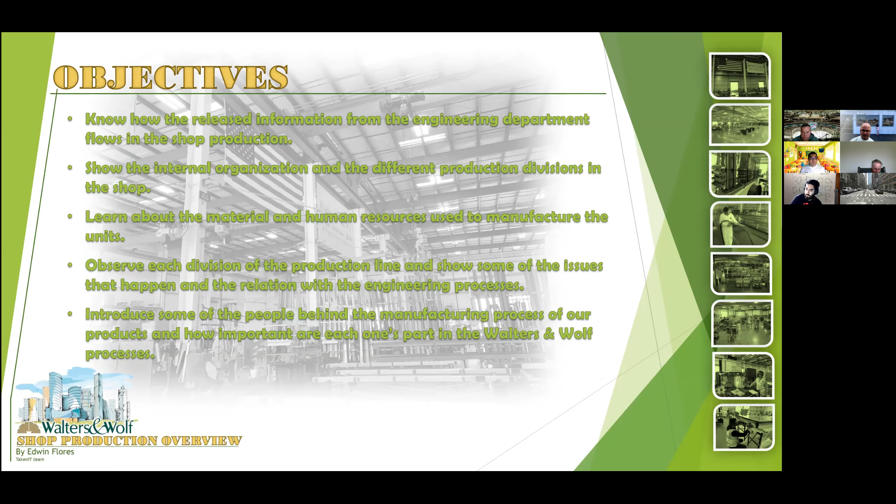I think to begin, it's a good idea to explore the objectives of my presentation. Some of them are: know how released information from the engineering department flows in the shop production; show the internal organization and different production divisions in the shop; learn about the material and human resources used to manufacture the unit; observe each division of the production line and show some of the issues that happen and their relation with the engineering processes; and introduce some of the people behind the manufacturing process of our product and how important each one of them is in the Walters and Wolf processes.

In this slide, we can see that Walters and Wolf currently has 7 shops in 4 different states: one in Seattle, Washington, one in Las Vegas, Nevada, one in Gilbert, Arizona, and in California there are 4 shops, 2 in La Verne and 2 in Fremont, where we can find Shop A and Shop B.

It's precisely in Shop B from Fremont that I'm going to base my presentation, due to the experience I had there while I was a production worker. I decided to take Shop B as an example, understanding that all the shops would follow the same production process, perhaps changing something, but following a general standard.

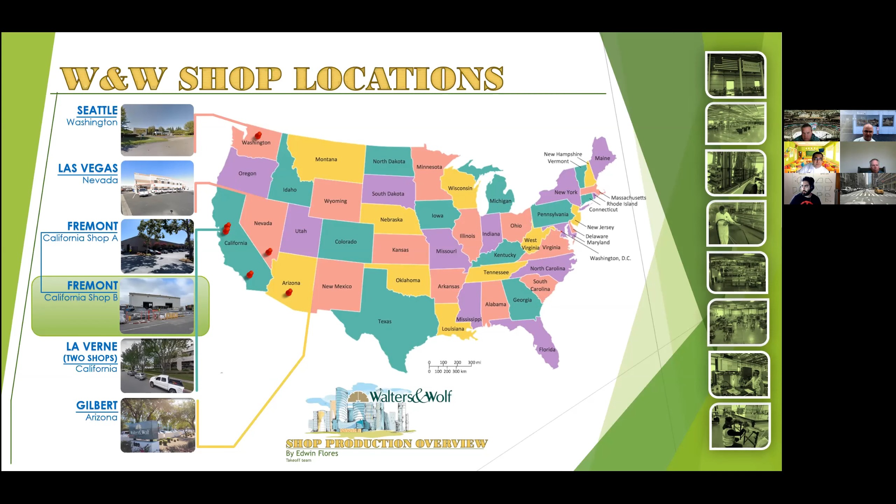The shop is organized based on experience that, through feedback, has managed to improve production time and quality of our products. In the shop, all resources are in constant movement. The shop works around 18 hours a day, divided into shifts.

In general terms, all shops are managed by a shop manager, but each shop has a shop foreman who keeps constant study, revision, and control about the whole process in 3 moments: before, during, and after the shop production. The shop foreman verifies strict compliance with the production process, respecting design criteria and special conditions previously reviewed and approved in releases from engineering. He is also the connection between the engineering department, shop, and field.

Parallel to the shop manager, and being support to him, we find the QC supervisors and leaders of division in the shop, all of them following and taking care of every part of the production.

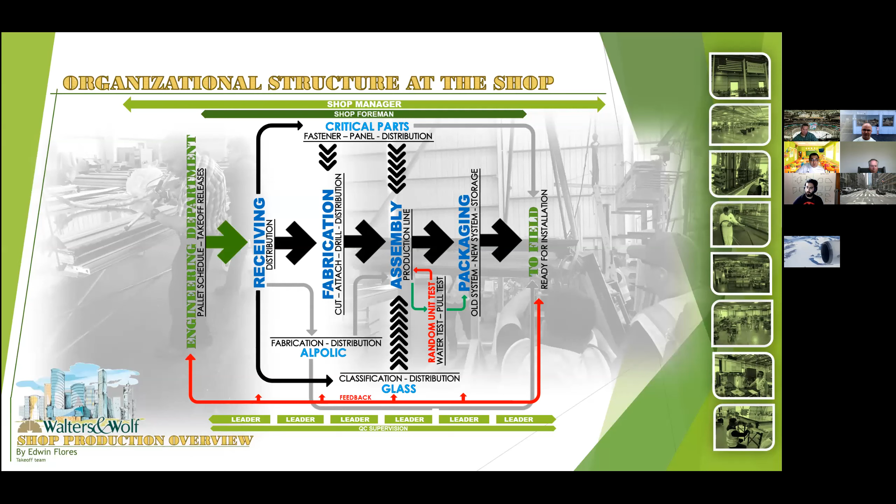Like part of the diagram talking about shop organization that I showed you before, before shop production starts, from the engineering department all necessary documents previously reviewed and approved must have been released, because all of them will be the guide to follow in production.

As you know, some of them are pallet schedule, glass schedule, panel schedule, and all the releases like fab ticket, units fab, metal, glass, etc. This is information we are familiar with, but before going to shop production, it needs to pass through many filters, and the last filter is programming, where the programmer gives a final review to the released information to avoid any issue.

It's here in programming where the real shop production begins, because the programmer enters all the information to the shop machinery to fabricate the parts for each unit.

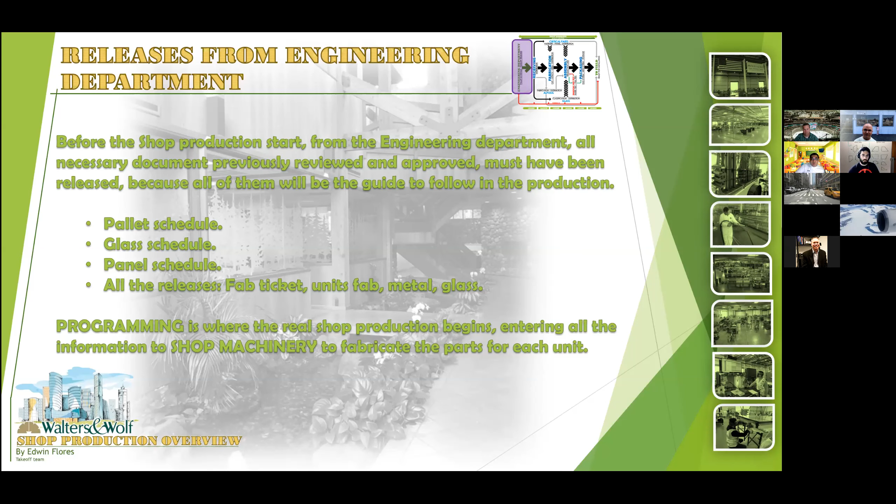If we keep moving along the direct line of the diagram, we find receiving. After the information from engineering has been released, the first stage of shop production is receiving. Here the material that will later become the designed and checked unit is entered, like glass, aluminum, fastener, composite sheet, panel, and others.

At this point the material has not been fabricated, so it's distributed to the different divisions of the shop in stock lengths, sheets, etc. The glass goes to the glass division, which will classify and distribute it to assembly. For aluminum, the group called material flows was created, with the specific function of making aluminum profile packages that will enter their respective fabrication, later used in assembly. The packages can be formed based on daily production scheduling or cut list.

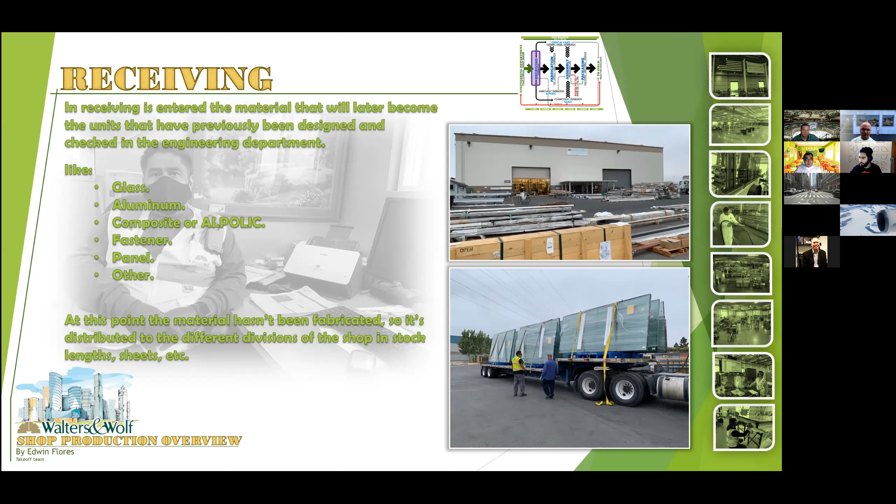For ALPOLIC fabrication, we move to the lateral side of the direct production line in the diagram. ALPOLIC is one of the lateral divisions of the shop production line, and basically it's a fabrication line apart, because after finishing composite panels, they ship them directly to the field. However, in some cases, the composite panels are fabricated to be part of a unit in shop production, being delivered to assembly.

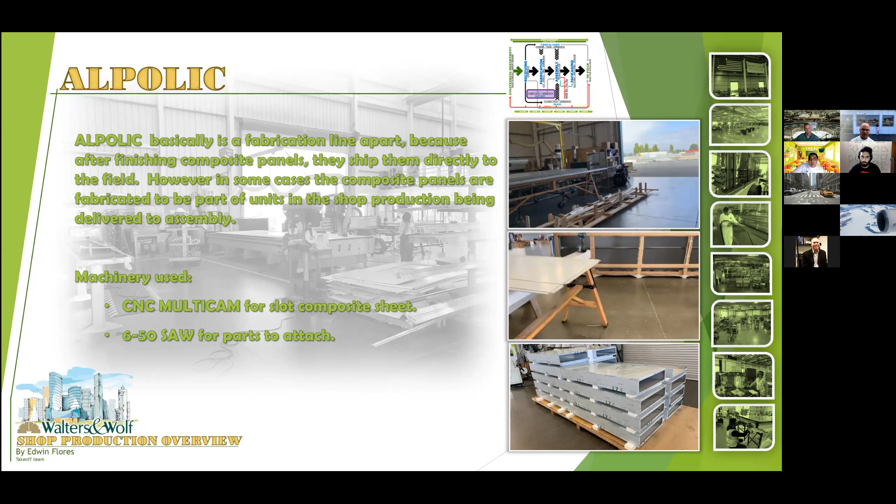For the specific case of ALPOLIC, it's the panel team which creates, checks, and releases drawings and cut lists, but again it's necessary to program the multicam machine. Like a mini production line, ALPOLIC fabrication receives composite sheets from receiving, then puts these sheets on the previously programmed multicam machine, and following the cut list, every sheet is slotted to be folded based on the design.

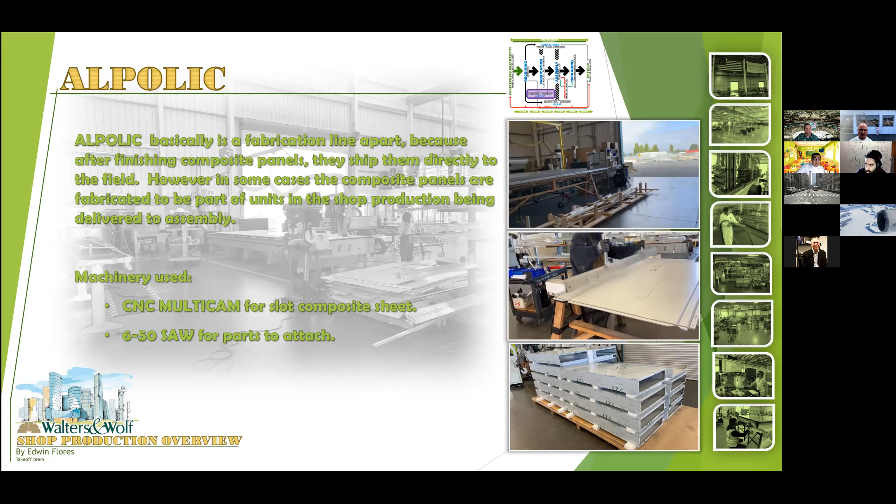After folding the slotted sheet, paying attention to the correct fold angle, all necessary attachments are added. When the composite panels are finished, they are carefully placed on pallets to be transported to the field or to the production line. Production here is per day, and normally multicam machines slot 20 units per day, but workers can fold around 30 sheets depending on the quantity of folds in each panel.

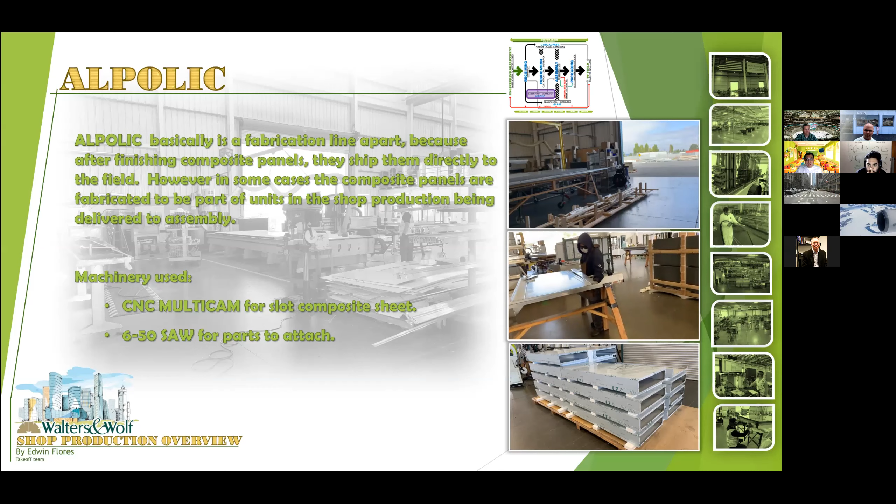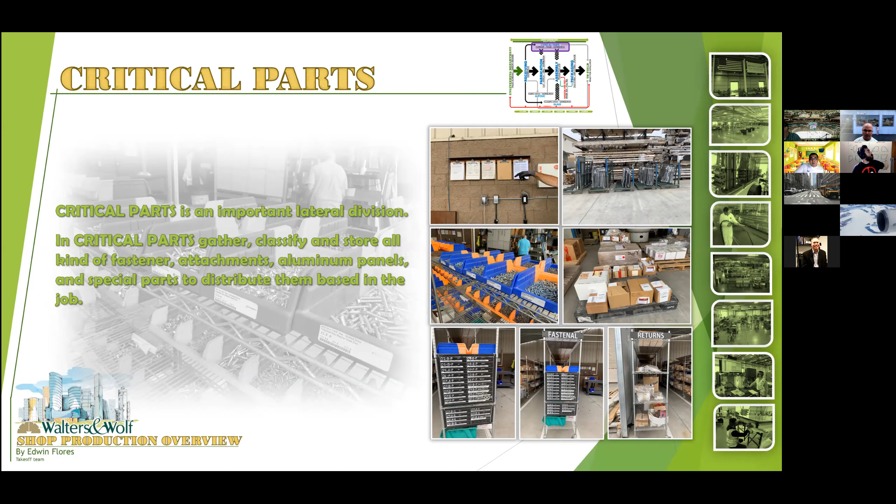The glass division: on the side of the diagram we find the glass division. When the glass arrives at the shop, it needs to pass through a check and classifying process before going to assembly, because it's necessary to take care of any defects or conditions that could affect the quality and warranty of the product. This is the reason the lateral glass division was created.

To classify before assembly, they use glass release, palletification, and glass by pallet. They also follow the standard operating procedure, or SOP, which is a logical sequence to make every step flow safely and accurately.

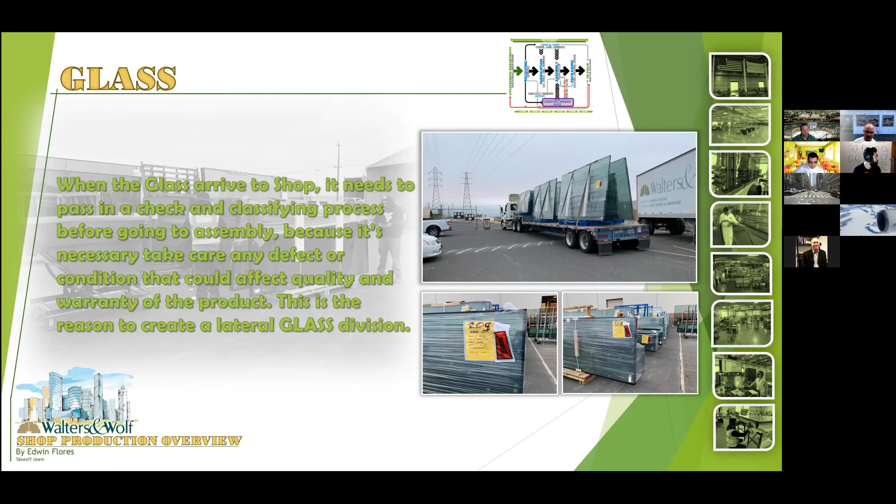With the glass already loaded, people proceed to open the crate, following the glass crate opening and securing SOP, which says: wear proper PPE, or personal protection equipment. When the crate is safely set on the glass rack, secure the load with rope.

The rope should be placed no lower than 12 inches from the top edge of the glass, and left on as good slats have been removed. Bend or remove any nails, to avoid accidents and glass damage. Glass inside the crate should not be loose. Choose the appropriate forklift that can handle the load, and check the rope and glass before manipulating.

The placement of the glass on the rack is done using the glass rolling rack SOP and the sorting glass SOP.

Some issues we can find when handling glass: if you don't carefully follow safety protocols or SOPs, things can happen like broken glass, incorrect placement of the glass, causing delay in the production line, or worse, serious personal injuries.

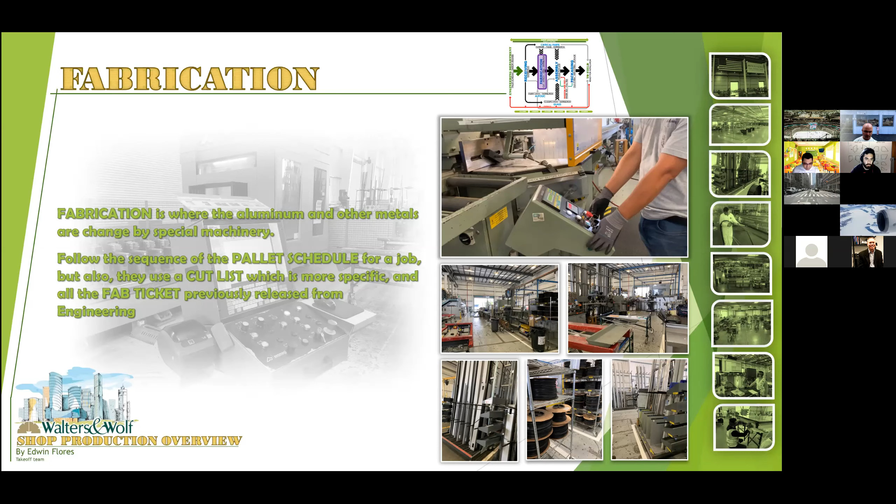The machinery in fabrication is Planet, which is slower than the other machines in the shop, but it's used for more complicated cuts with minor details.

The other machine is Quadra. It's faster than the other machine in the shop, but its cuts are less complex.

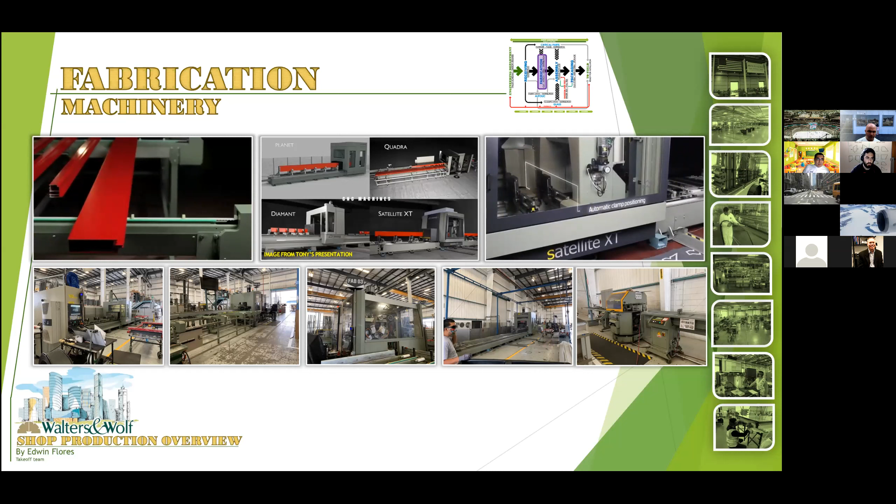Diamant is used for holes and notches. And the Satellite XT, like Tony told us in his presentation, is basically the modern version of Diamant.

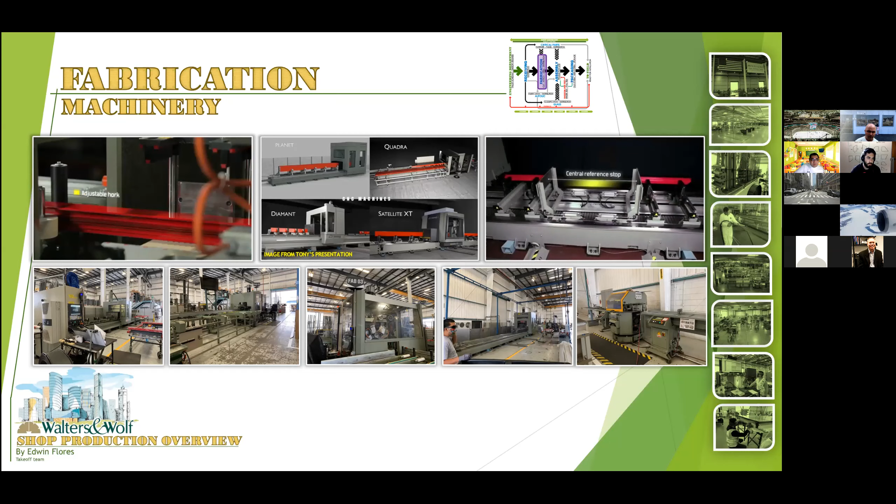In the fabrication process, the part needs to be marked with the mark number. It will also be cleaned using an air hose to blow any metal shavings off the part or from inside of it. It's important to wipe down any oil, dirt, or layout line on the part with an alcohol wet rag, then with a dry rag, without erasing the mark number when the part is cleaned.

When all parts are fabricated and their attachments installed, they will be placed on racks with a slot to separate each unit, staged for the next division, which is assembly.

Some issues in fabrication: when the fabrication process starts, the machine operator follows all SOPs in each fabrication stage and trusts that all released fab tickets have been reviewed and approved and the machine has been programmed. That is why the programmer performs a last back check looking for any issue.

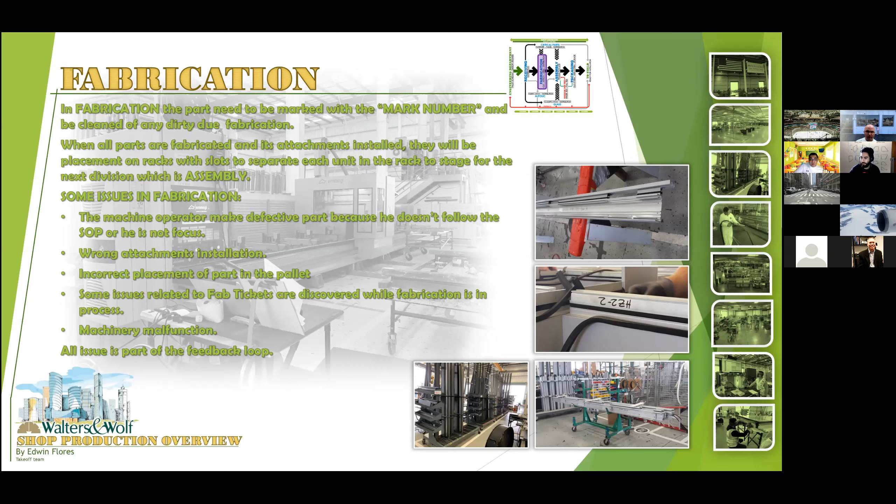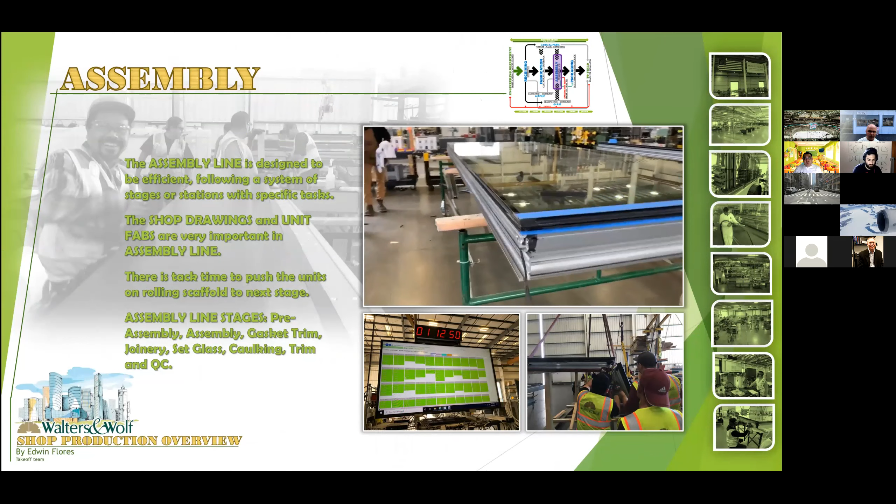Continuing with our diagram in the direct line of production: like a big Lego system, when all parts are ready and placed on their respective racks, with one to six units depending on the pallet schedule, the assembling of each unit starts.

Although most of them follow the regular process based on shop drawing and unit fab, some have special conditions that require extra care and attention in assembly.

The assembly line is designed to be efficient, following a system of stages with specific tasks, achieving specialization and quality in each of them.

Unit production varies based on the pallet schedule, and the quantity called per day can be set depending on how complicated the unit assembly is.

There is a takt time to push the unit on a rolling scaffold to the next stage. It's a big circle dancing to the takt time rhythm.

The stages in the assembly line also vary with the necessity or how complex the project is, but normally we find pre-assembly, assembly, gasket trim, joinery, set glass, caulking, trim, and QC.

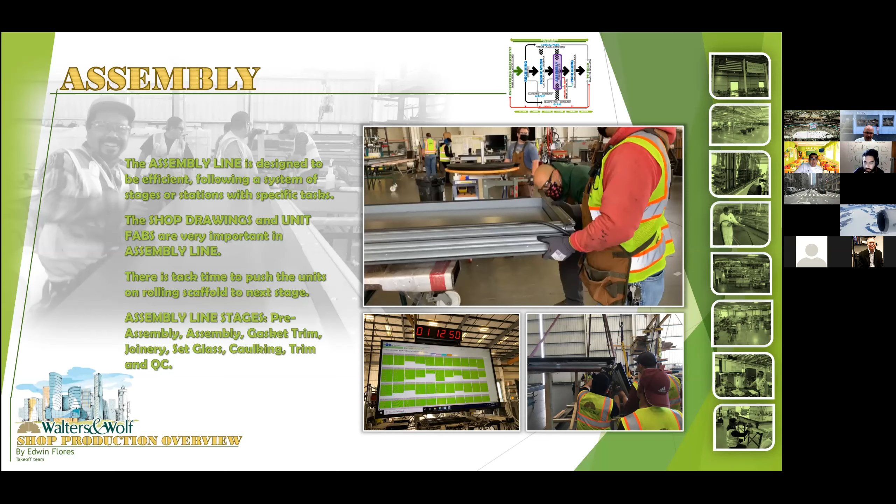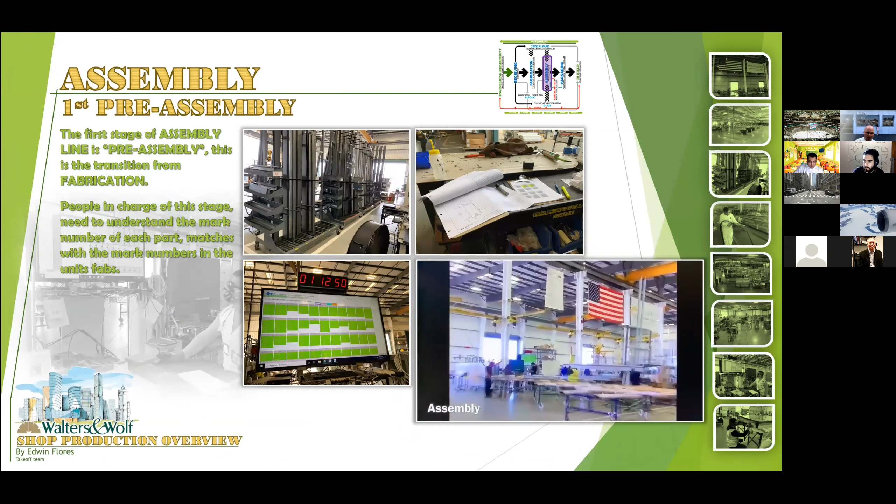The first stage in assembly is pre-assembly. This is the transition from fabrication.

Normally, it's a stage for just one person, but there are some projects with heavy parts, especially vertical ones, so it's necessary to add more than one person.

In this part, it's important to have available a copy of the pallet schedule, a copy of the unit fab, and some other things like black markers, pencil, and highlighters in different colors.

People in charge of this stage need to understand how the mark number of each part matches the mark number in the unit fab to be able to locate every part from the rack to the scaffold.

The first thing to do is bring the rack from the pick line between fabrication and assembly to the workstation. Then take the unit fab copies which come with the rack to compare with the pallet schedule to make all the necessary marks or not.

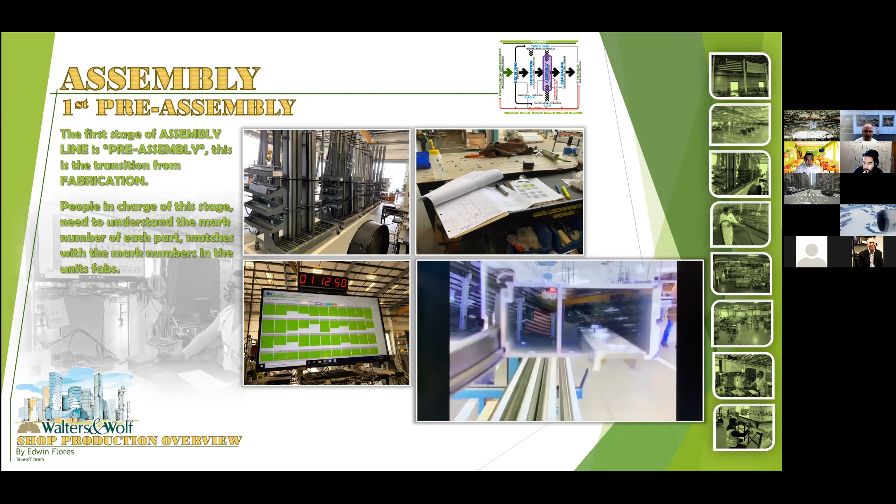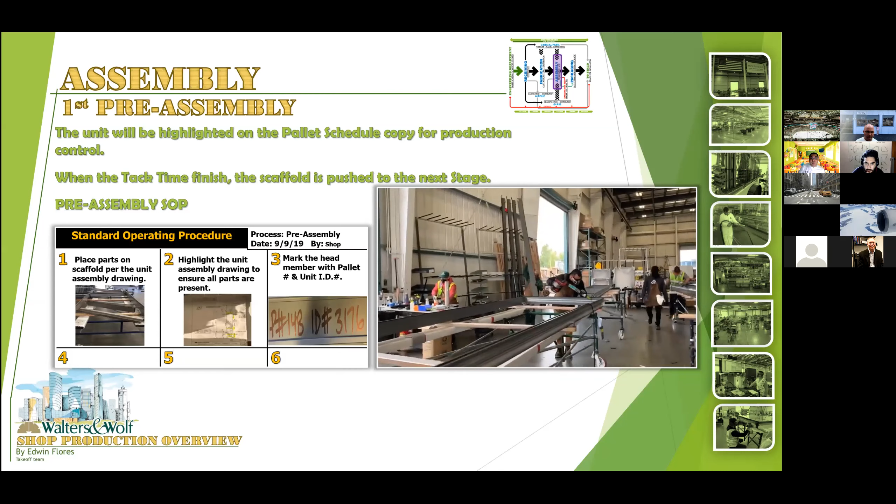Pre-assembly is standard operating procedure, to keep constant improvement and quality control in each stage. Visibly located, there is a copy of the respective SOP for the stage.

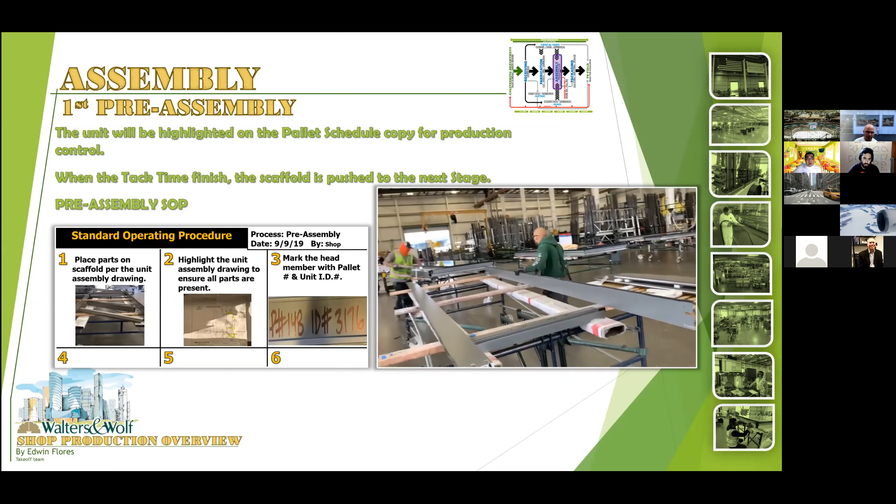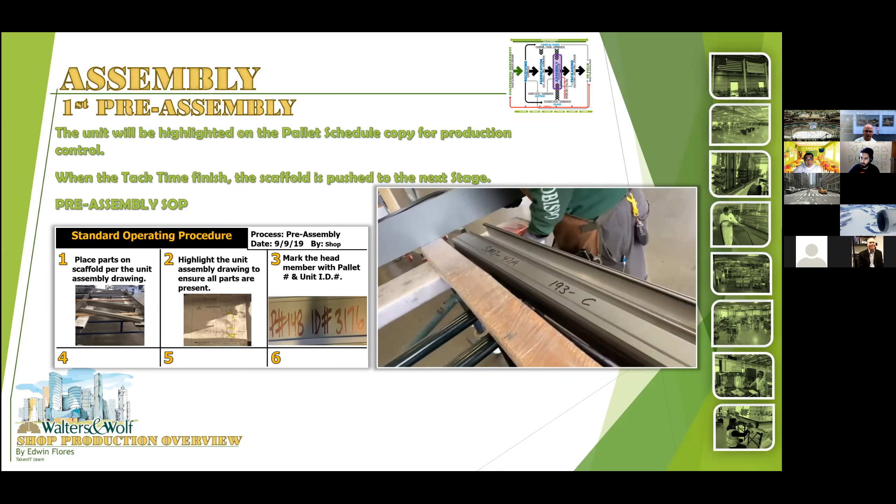In this case, place the part on the scaffold per the unit assembly drawing. One scaffold needs to be always ready. Highlight the unit assembly drawing to ensure all parts are present. If not, look for it or ask in fabrication. Mark the head member with pallet number and unit ID.

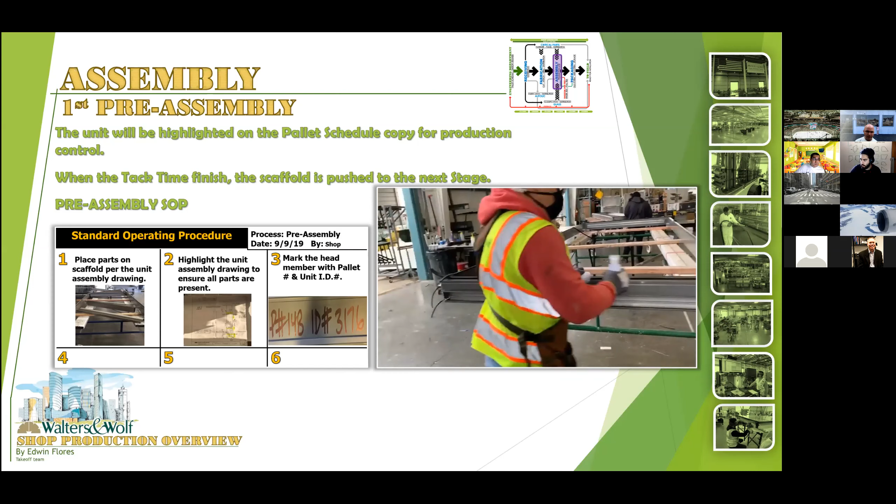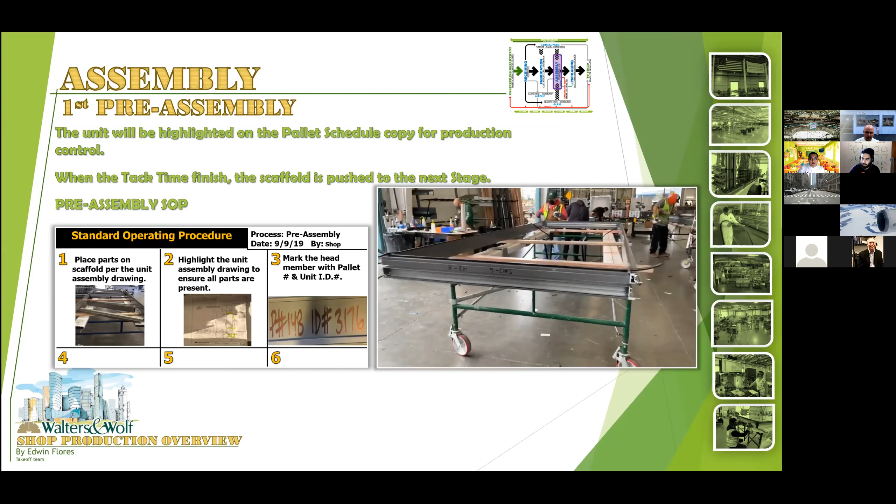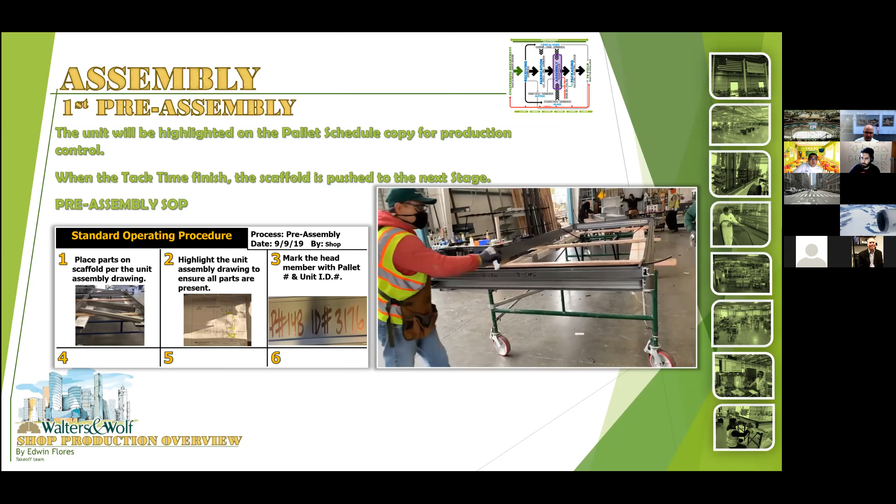On the pallet schedule, a copy will be highlighted showing the unit loaded on the scaffold for production control. The unit fab or unit drawing will be checked and placed in the scaffold, because each stage will be used like the main assembly guide. When the takt time finishes, the scaffold is pushed to the next stage.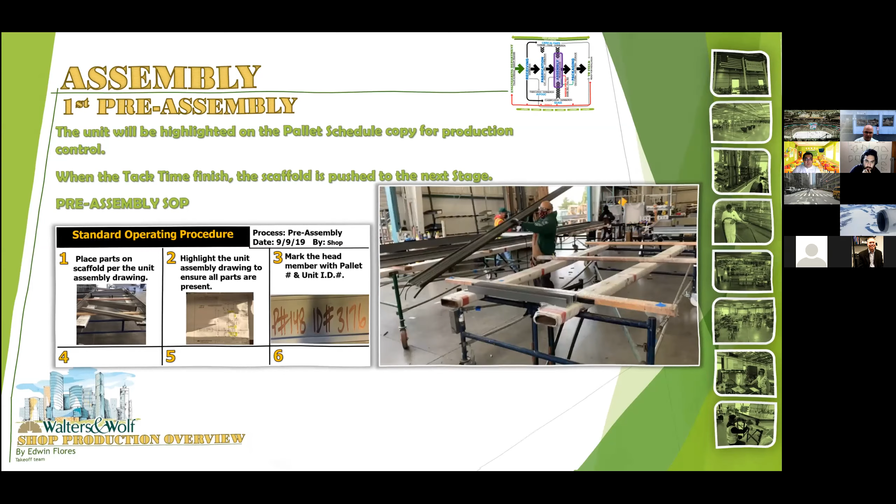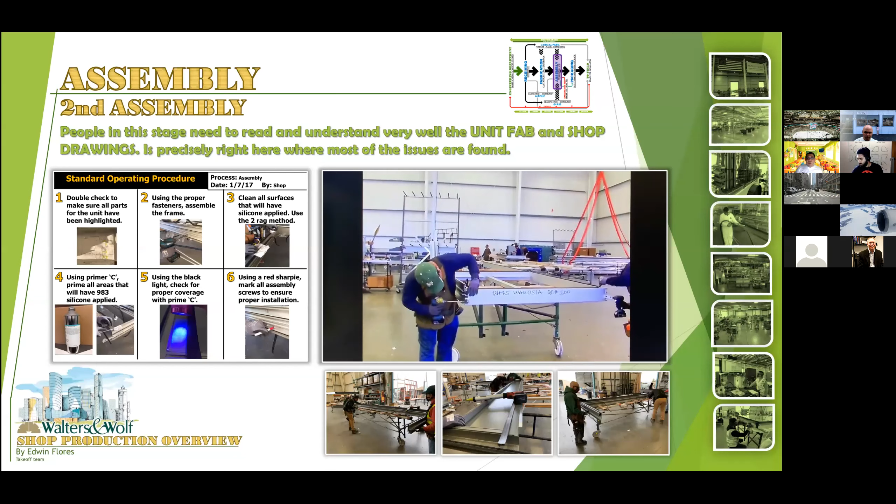Assembly. Some units are easy to assemble, but there are many complicated ones. A deep analysis of the location of every part will be done in assembly. It's not just screwing and that's it. People in this stage need to read and understand very well the unit fab and shop drawings.

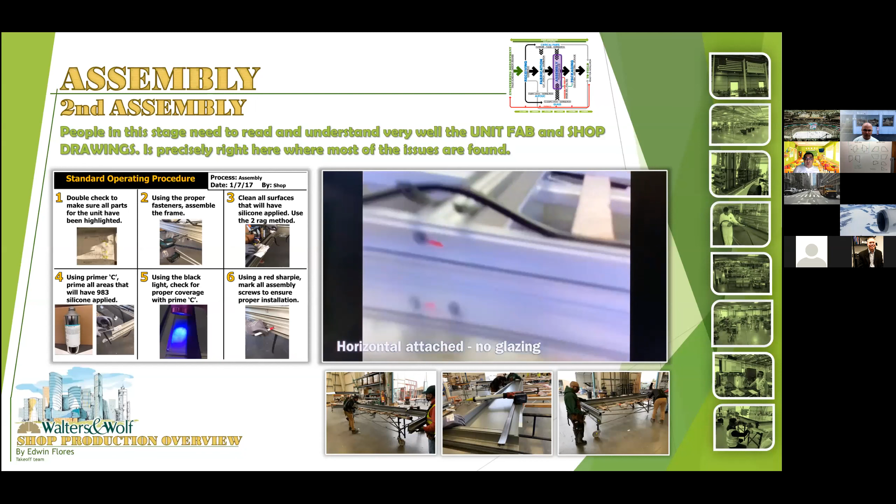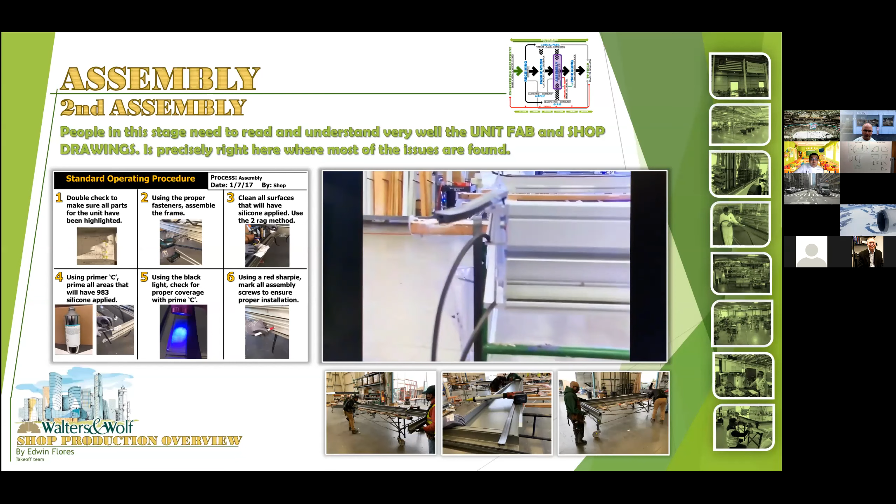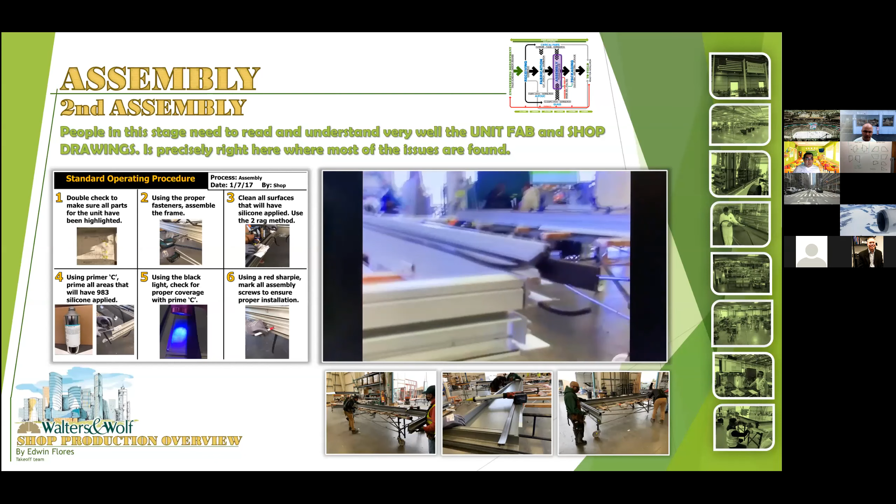In all moments, they are supported by the line coach, the QC supervisor, and the shop foreman when something looks weird. And it's precisely here where most of the issues are found. Maybe it's because until the pieces are joined, we don't realize that something doesn't fit.

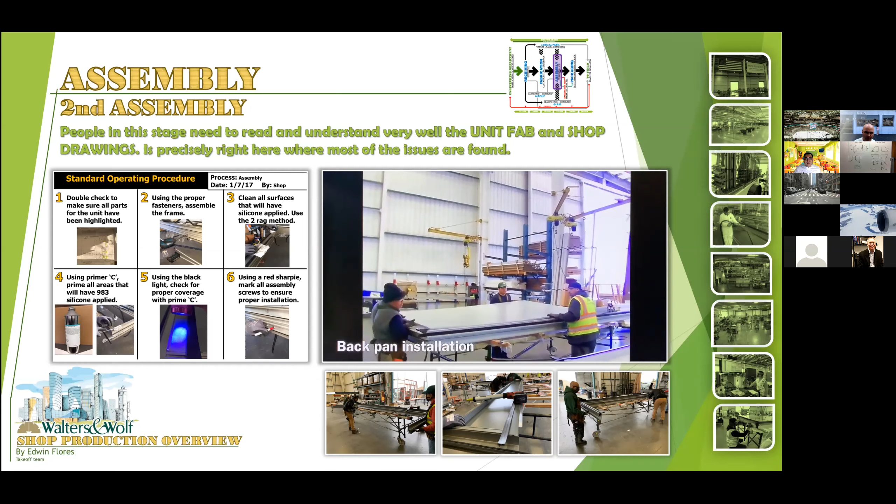However, they try to fix it while the production line is running. In many occasions, they succeed, but in others, they need a new part or consult the engineering department about the issues, requiring leaving the unit on hold, which implies leaving the pallet incomplete for packaging, and that means delay.

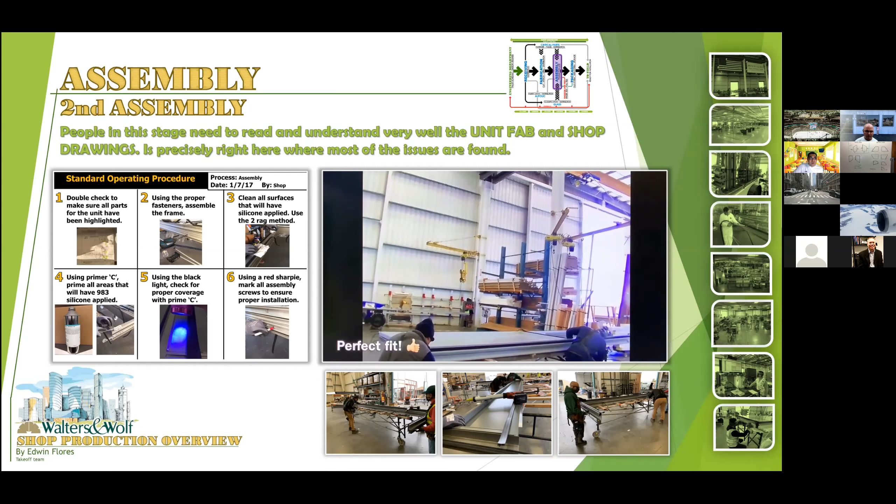Due to this stage joining all the pieces, it's right here when critical parts bring all the special attachments, including aluminum panels. The assembly standard operating procedure is double checked to make sure that all parts for the unit have been highlighted to avoid missing items.

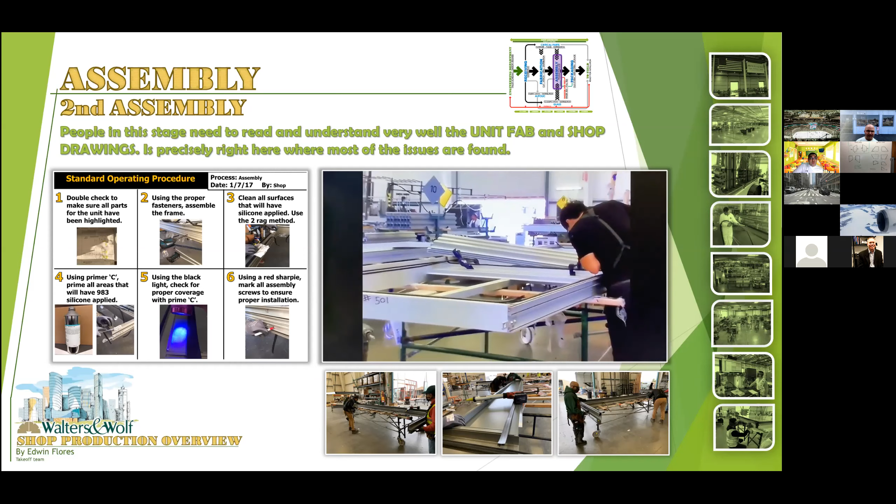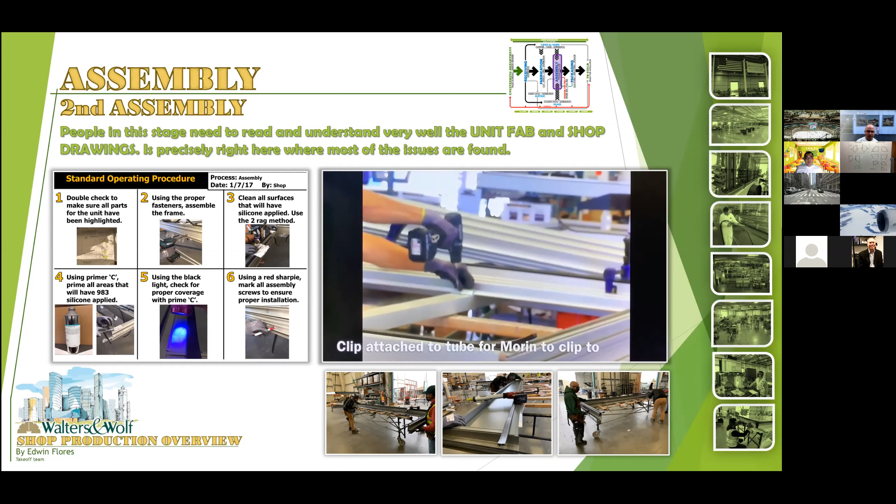When most of the parts are already joined, using the proper fastener, assemble the frame. Before this is very important.

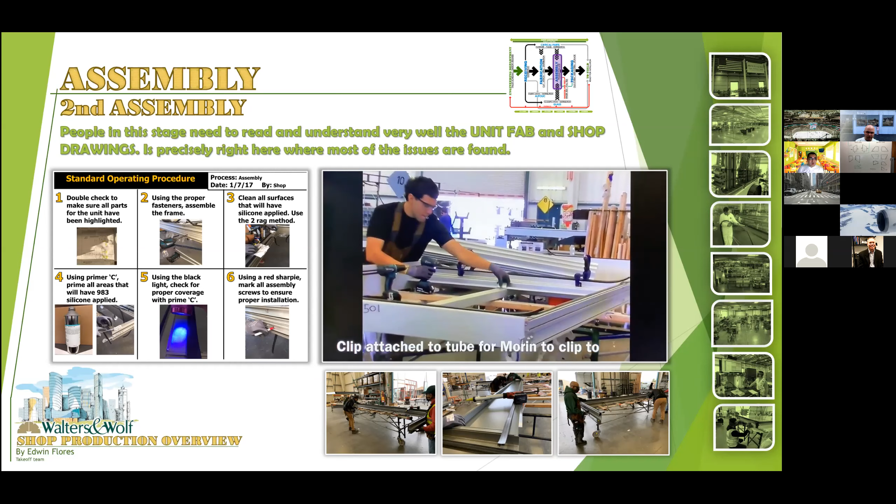Check the correct location for all parts. Sometimes parts look similar, but the difference is slight. For example, the SRT or the location of the capture horizontal.

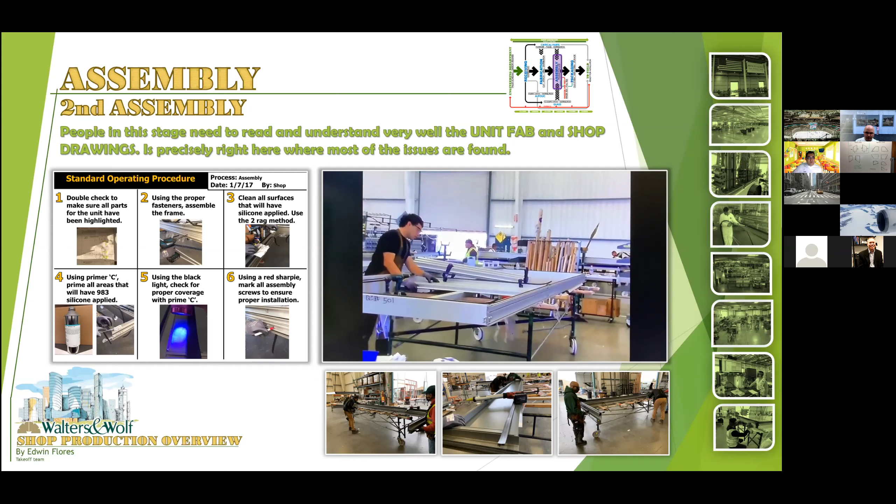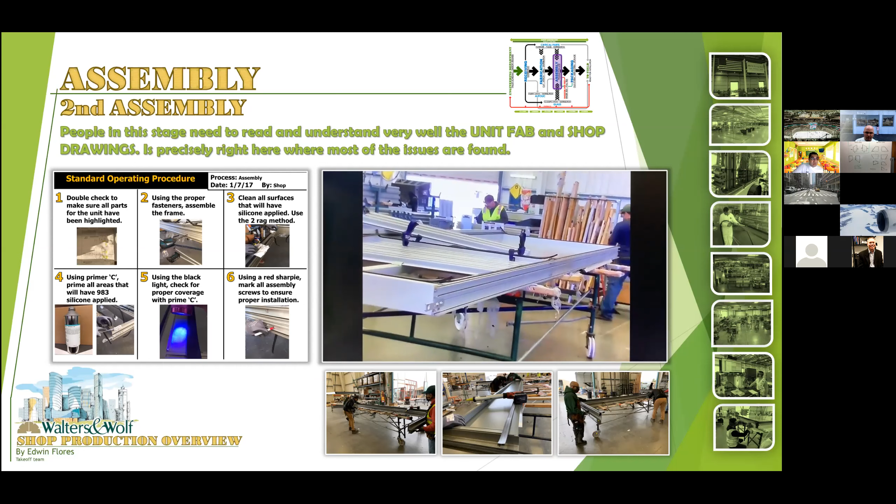Clean all the surfaces that will have silicone applied. Use the 2 rag method. The process implies using a wet alcohol rag to clean, especially oils from fabrication, and then a dry rag.

Using primer, prime all areas that will have silicone applied. It's necessary to apply it only on the surfaces where the silicone will be applied, because primer can damage the aluminum finish.

Using the black light, check for proper coverage with the primer. Steps 4 and 5 are important, because if the primer is not adequately applied, it will affect the silicone adhesion to the aluminum.

Using a red Sharpie, mark all assembly screws to ensure proper installation. It's a kind of double check to avoid issues in glass installation. I'm going to add the adequate check on the QC checklist on the unit fab reverse.

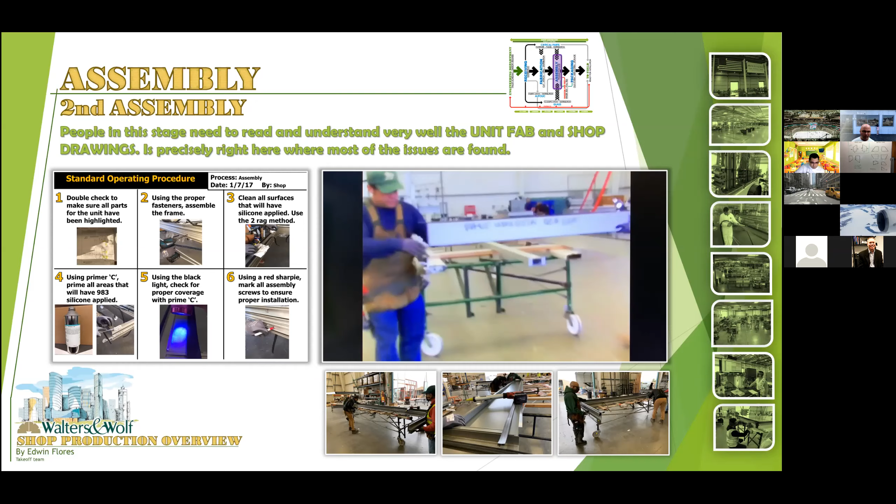When all unit parts are assembled, it's gasket trim time. The idea is removing the part of the gasket that is left over, but in a way that keeps water access blocked. It's a simple process, but if people in charge are not careful, it can affect the quality of the unit.

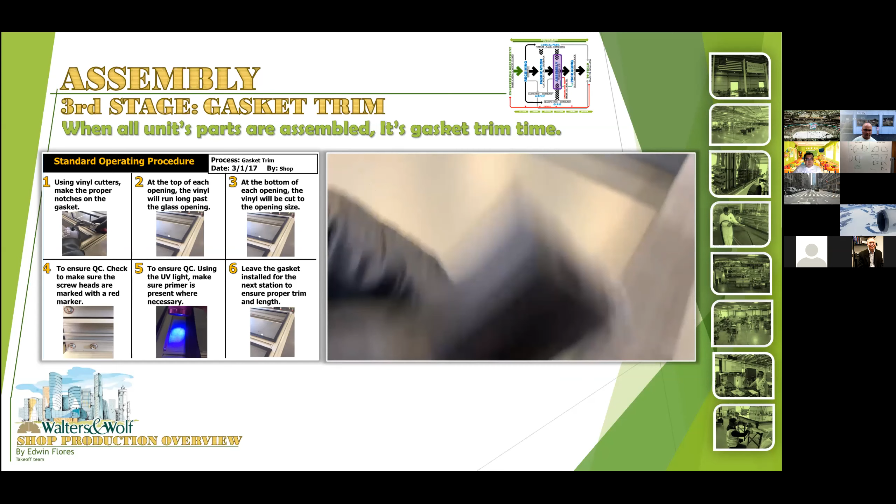There is a standard operating procedure to ensure that it runs properly. Using vinyl cutters, make the proper notches of the gasket. At the top of each opening, the vinyl will run long past the glass opening.

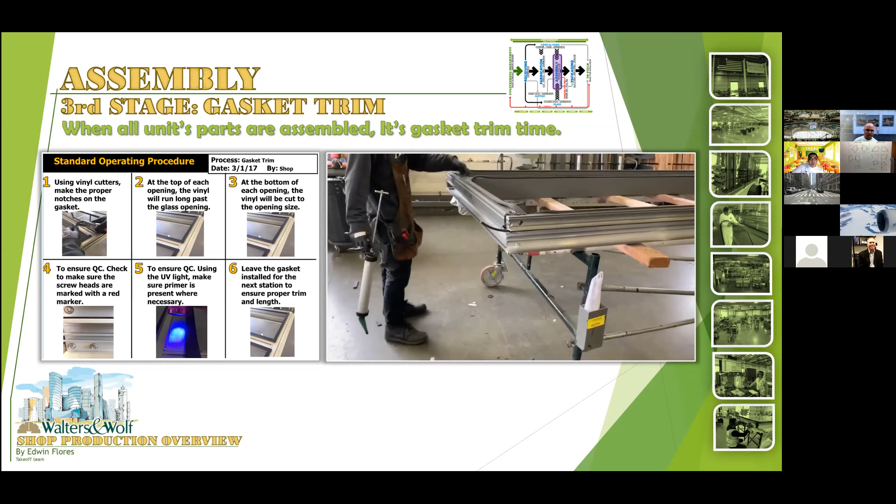At the bottom of each opening, the vinyl will be cut to opening size. To ensure QC, check to make sure the screw heads are marked with the red marker. This is a double check of assembly.

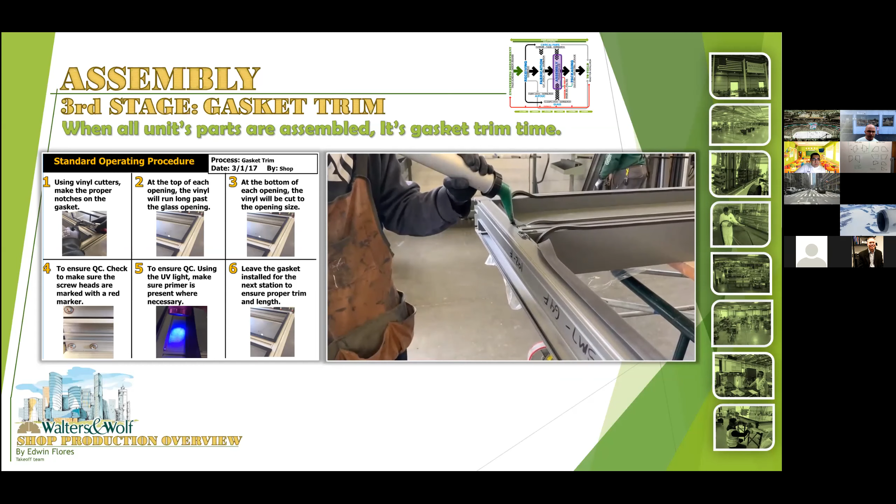To ensure QC, use the UV light. Make sure primer is present where necessary. Leave the gasket installed for the next station to ensure proper trim and length.

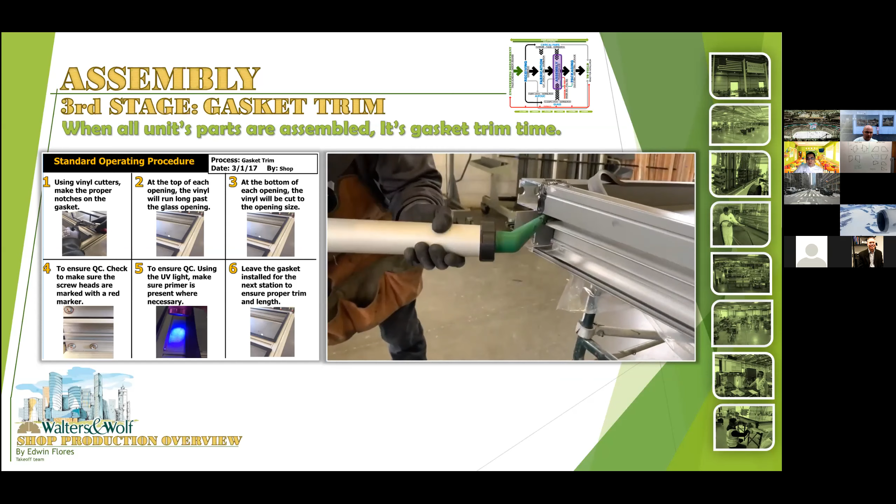Immediately after gasket trim is the final seal, the gasket and joinery. When silicone is dry, it will avoid movement at the corners, but the most important function is to block water that can go inside the window through the joints.

The joinery SOP: before starting, make sure all gasket is properly trimmed. Apply silicone to the proper areas. Reconnect the gasket, making sure there is silicone where the two gaskets meet.

Using tyzack on the necessary areas, once complete, initial the vertical by the joint. This is a kind of QC.

Something else about this stage is that people need to do a clean job, because silicone can stain glass, and that is really bad when it happens if no one realizes about it. And it's worse if the back panel will be installed over that glass.

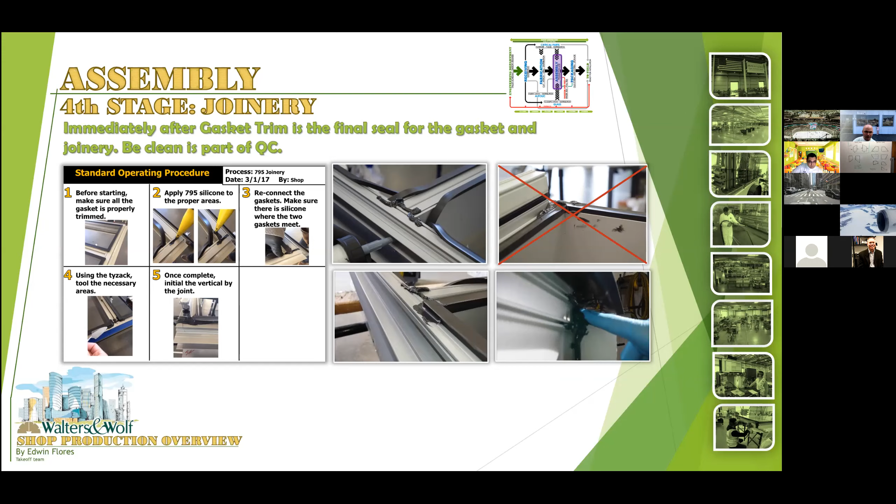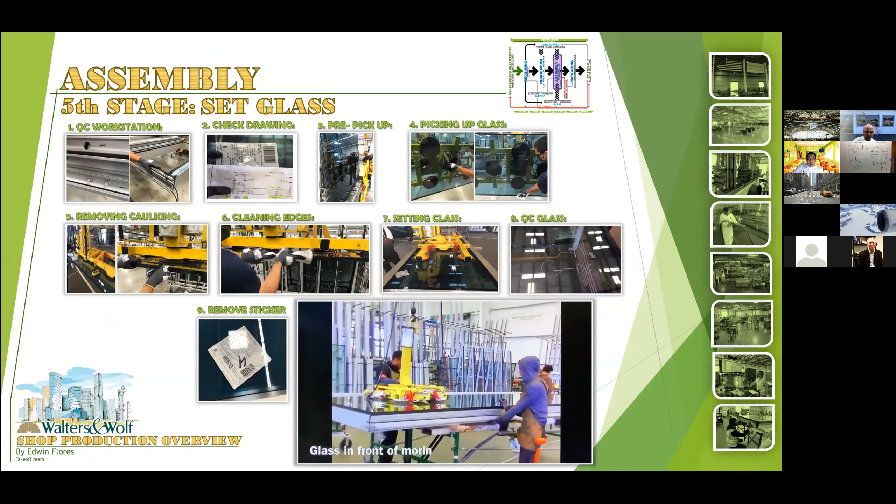Set glass. The scaffold with the unit assembled should be appropriately trimmed and sealed, and each gasket and joinery checked when it arrives to set glass.

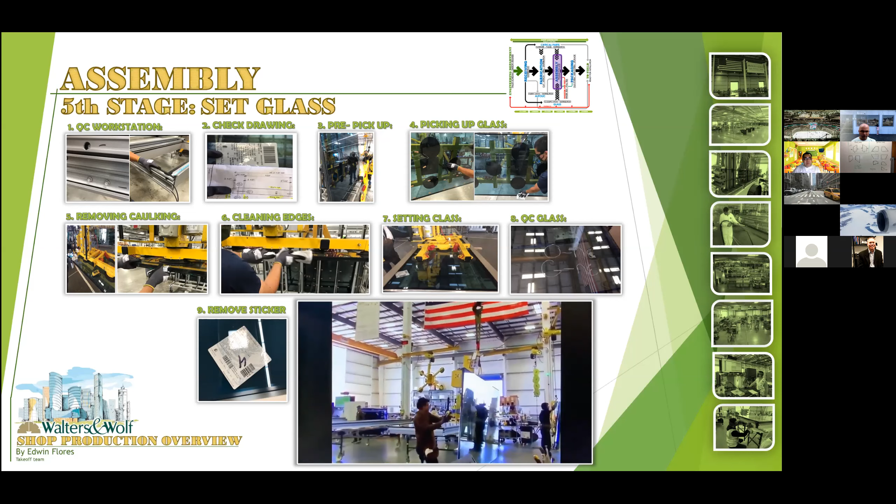Something important is that people in charge should have the rack with the glass on the pallet staged in the assembly process.

The standard operating procedure to set glass is: check assembly screws are marked, gasket is trimmed properly, and joinery sealant is properly applied, because after glass is placed it will be hard to fix.

Per the assembly drawings, locate the proper glass. Prior to picking the glass, make sure the picking surface is clean of dust and debris.

Pick glass using the suction cup. Then remove buttons from the back of the glass, and spray and wipe the glass.

Turn glass flat and scrape excess caulking off the edge. Grab two rags. Apply alcohol to the first rag to clean the edge, and use the second rag immediately after the first to dry off the alcohol.

Set glass tight in the proper opening of the setting block, and make sure it's in the right location from left to right.

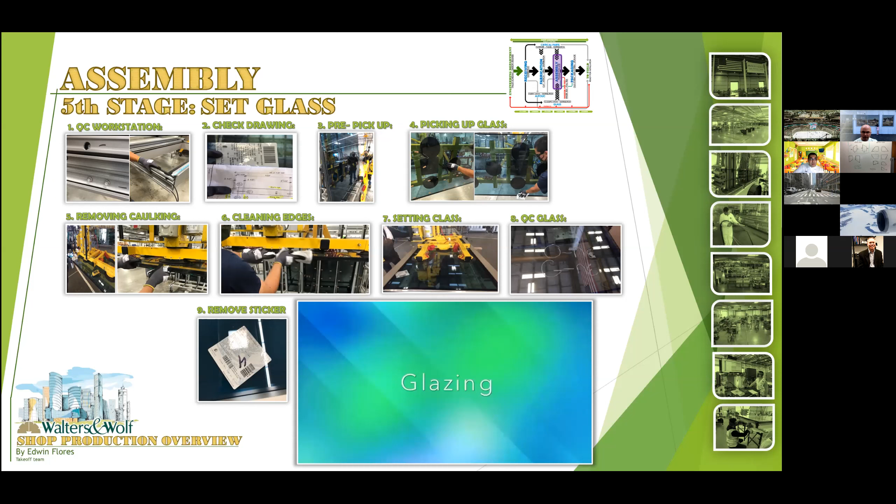QC the glass for correct orientation and mark the glass properly with a glass pen. Remove the sticker from the glass.

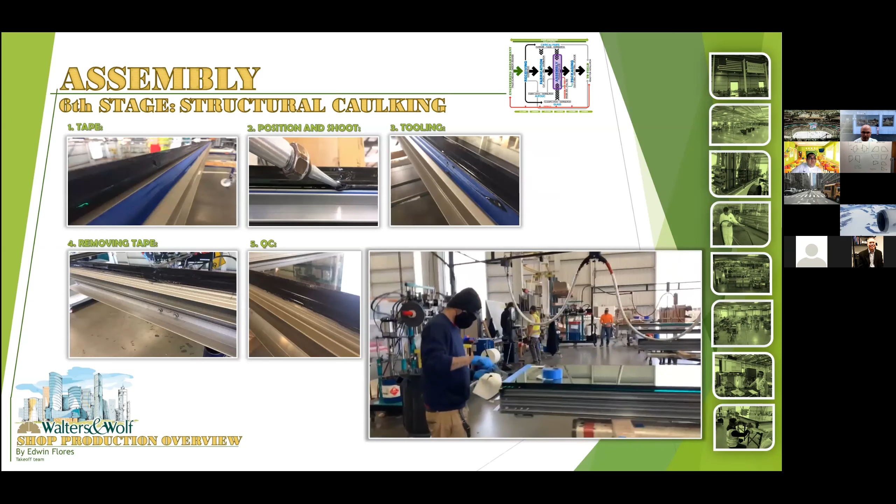Some important things at this stage are that the glass must be in the correct position, because once the caulking is applied, it will be difficult to fix.

Also, the aluminum surfaces where the caulking will be applied must be primed.

The SOP to apply the structural caulking is: tape to be applied on the male vertical. Position the tip at the proper angle and shoot the necessary areas.

Make sure to go at the proper speed to ensure the correct amount of sealant is applied. Tool the necessary areas. Be careful when tooling to avoid making a mess.

If tape is present, pull the tape and clean off any excess sealant from the frame. Quality control the shooting to ensure there are no voids.

At this stage, every day a caulking sample should be taken for testing.

Random test: every day, from the assembly line, a finished unit is selected to do the water test. This checks if the assembly procedures are correct. If not, it will be important to find the problem. Even the production line can be stopped until the problem found in the water test is fixed.

Other important tests in the shop are the pull test and the butterfly test. Both are to gauge the caulking quality. The idea of constantly testing the unit is to guarantee high quality in the finished product.

And the last part of the presentation is packaging. It's the last part of the shop production. After this, only shipping the pallet to the field remains.

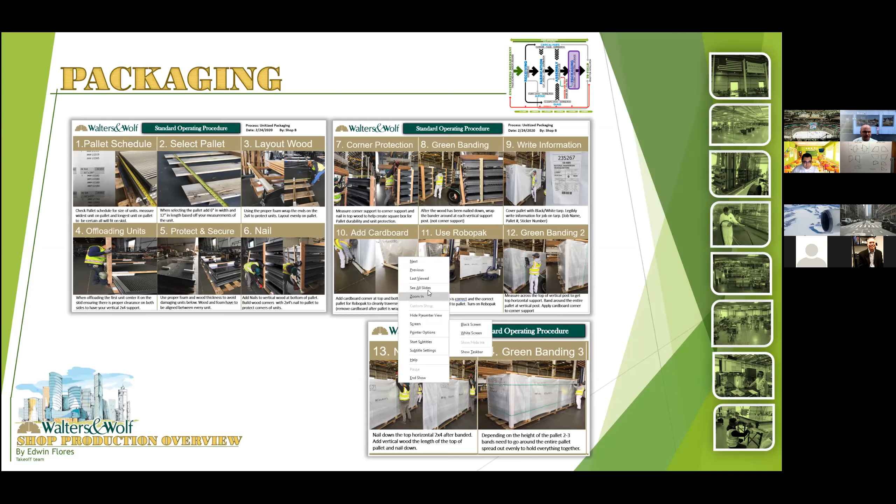One of the things I'd like to point out is that the shop has SOPs that they follow. Edwin, you pointed out that there's one of these SOPs attached at each station so they have that nice visual control when they do each portion of the operation. They'll also have a copy of the unit assembly drawing that tracks with the unit as it goes through its stages.

When we have units with extended covers or horizontal face stops, for example, and it's not obvious where those connections meet with the verticals, that's why we put notes on there, for example your sill member might be the FS1, and we note that FS1 equals daylight plus 1 and 11/32 on the left. That way, when the shop gets to that stage, if they don't have a good visual on the unit itself — in this case with an Inviso on both sides, it's hard to tell where that horizontal face stop would align without some kind of visual control. So one way the shop uses the engineering visual control is having that note on the unit assembly drawing.